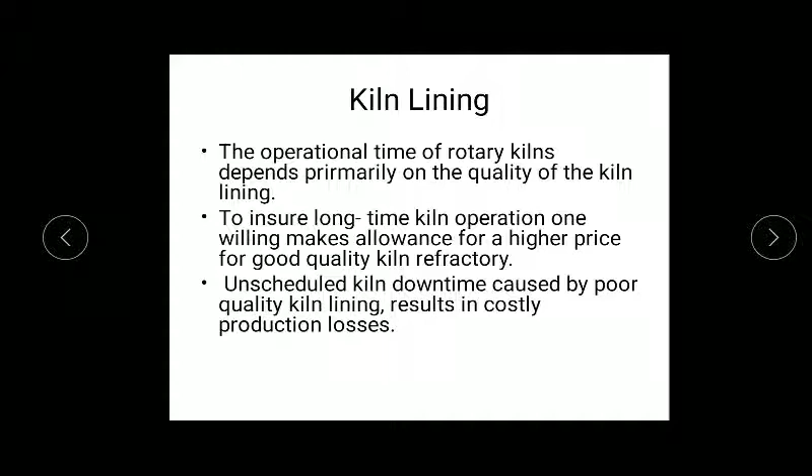And one more aspect which is related to this lining, an economical aspect, is that when you shut down your plant for relining of the refractory lining or repairing of any refractory lining that has been damaged, you are actually causing loss. So it is not very economical to shut down frequently and redo the lining. Hence it is better to spend more on refractory quality and have a long running refractory to have good economy.

So the function of refractory lining is to protect the kiln shell from the influence of flame and of the hot kiln feed, and reduction of heat losses caused by radiation and convection of rotary kiln shell. The main purpose is to protect the shell from the hot flame and the hot kiln feed. There is a burner inside the rotary kiln, and the raw material coming inside the rotary kiln is also at a very high temperature when we are using a preheater and pre-calciner.

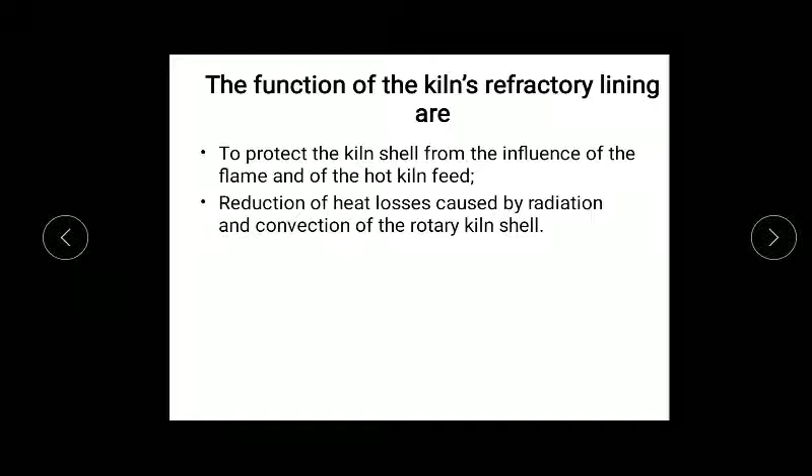And another function of refractory lining is to prevent heat loss. Means the heat which is generated inside rotary kiln should stay inside rotary kiln. There should not be any leakage of the heat, to have heat economy. So the demand made on kiln refractories depends on following properties. These are the properties by which you decide which refractory to use in the rotary kiln.

As you know, there are various temperature zones in rotary kiln, like drying zone, preheating zone, calcining zone, burning zone. The shell material is same in all the zones, but there are different temperature zones, hence different refractory will be used in different zones. So it is not only one kind of refractory; you will need a variety of refractories in different zones.

So to decide which refractory to use, you need to see these properties. You have to see mechanical strength, as the material is being fed into the rotary kiln from some height, and the refractories need to withstand that.

Then refractoriness. Since the rotary kiln is operating at very high temperature and there is certain amount of material lying on the refractories, the refractories need to withstand this high temperature plus high load, hence this is also important. Next one is resistance to thermal change. As you know, there are different zones in the rotary kiln, so there will be a variation in temperature.

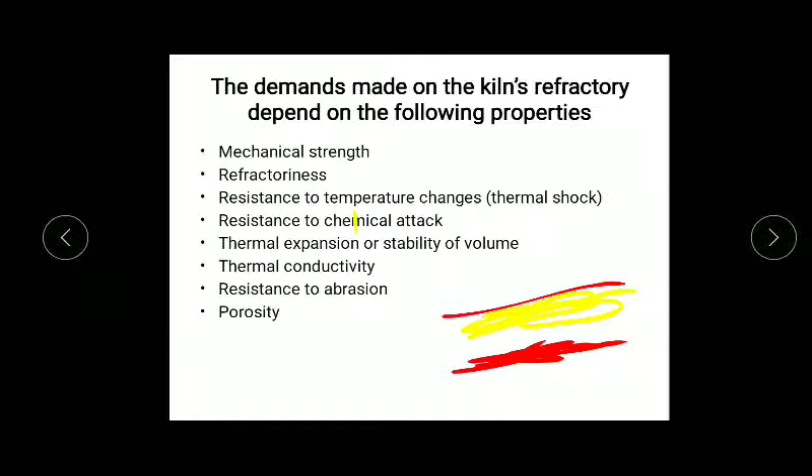Then the last thing is porosity, which is very much interrelated to many of the properties like mechanical strength, thermal conductivity and all, which needs to be taken care of. Then, for installing a refractory lining in a rotary kiln, you actually have 3 ways: one is brick lining with mortar, then you have dry lining, then you have the adhesive method.

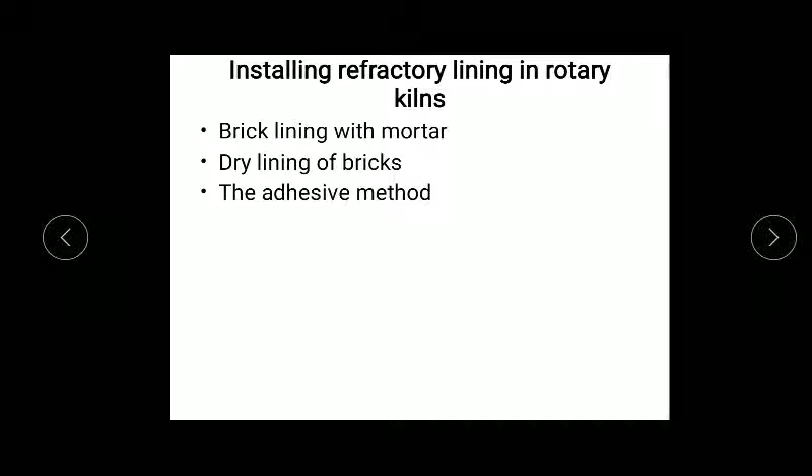So in brick lining with mortar, mortar is nothing but refractory high temperature cement. You take that cement, you take refractory brick, and you line the first half semicircle of the rotary kiln. Then you place a screw jack which will hold the refractory only at the ends, and when the cement sets, they will all stick to the surface.

Then this screw jack is holding the last 2 refractories, and they are all in compaction. They are all in stress, all compacted, meaning there is pressure from here and here, hence they are held tight together, and only these 2 refractories at the end are fixed with screw jacks.

Then when this semicircle is completed, the rotary kiln is tilted 90 degrees and again it is lined here. Then the screw jack is placed here, you can see in this figure. Then after this the rotary kiln is tilted another 90 degrees, and the rest of the refractories are lined here.

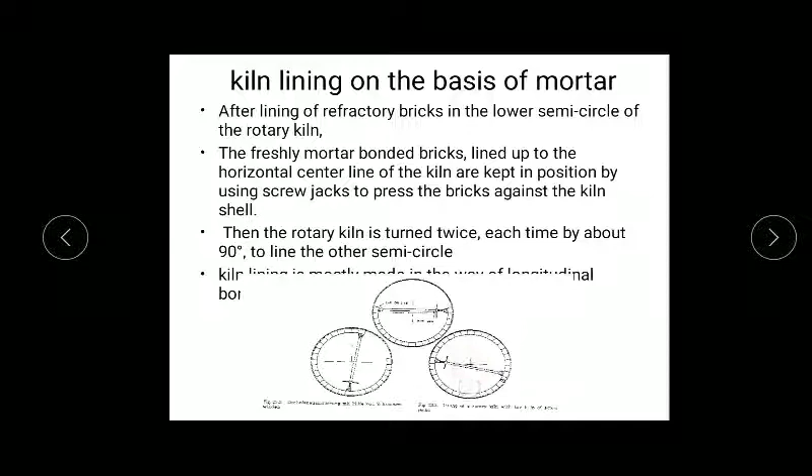So there are 2 ways in which this refractory can be lined. One is the longitudinal way and another is ring formation. You can see here in this diagram, the refractories are lined in the longitudinal direction. First the semicircle is done, then it is rotated and another semicircle is completed.

But in ring formation, you form the first ring completely, then the second ring completely, then the third ring completely. In this way you move forward. In ring formation, there is an important thing called the key brick, which is the last brick you place when you complete the ring. That is a very important thing. When you place that key brick, you will remove all the screw jacks, which you will see in the next slide.

In dry installation, you are not using any adhesive or cementing material to paste the refractory to the surface of the shell. You are directly screwing all the refractory to the shell at first, using screw jacks. Then once they are all lined, only one gap is remaining. You fix that gap with a key brick.

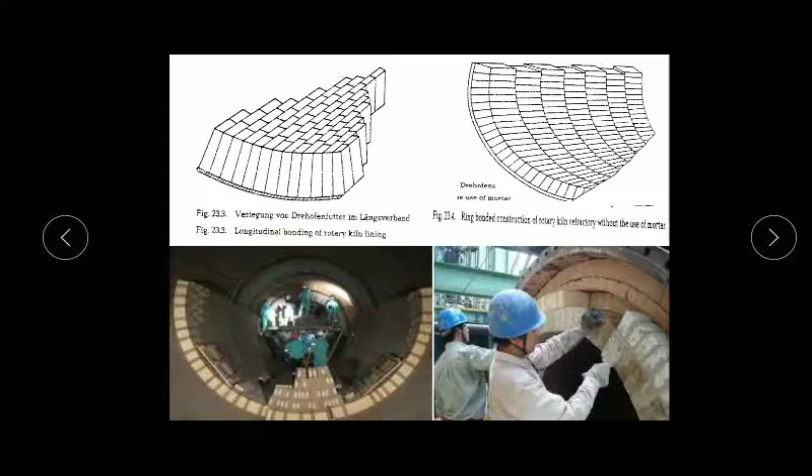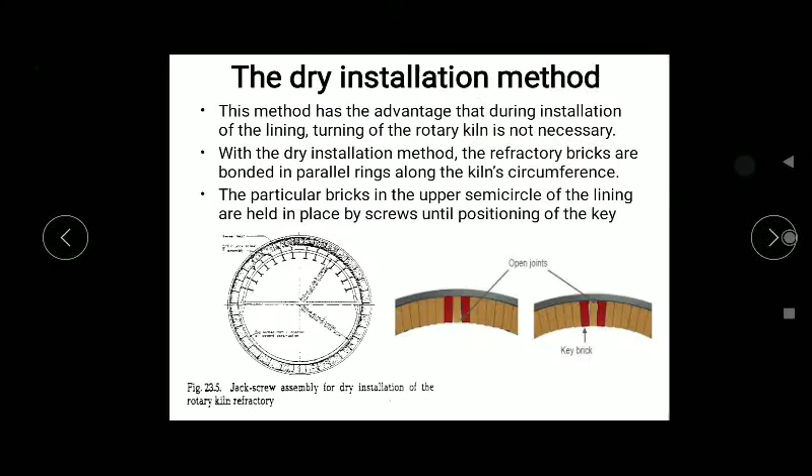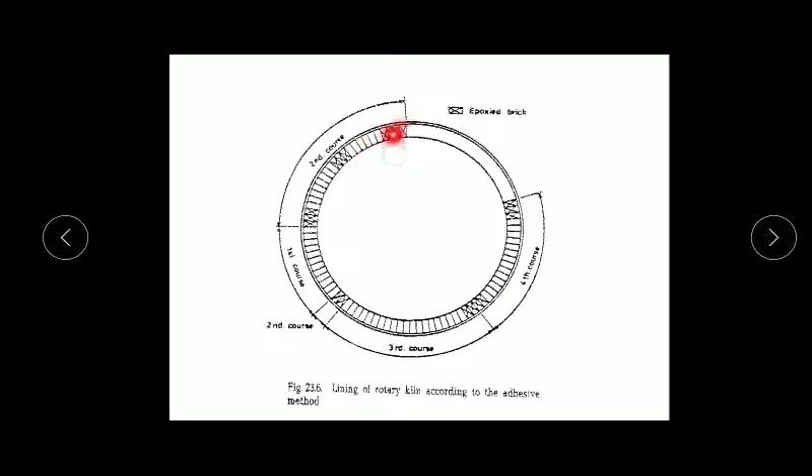Now this part is fixed, means it is pasted, it is glued to the surface using some additives. These are the refractories which are not glued, they are in compression. First this is done, then these refractories are also laid. Because these are fixed, when you place the refractories here, they will be in compression and they will be tight without any glue. They are placed between these two layers of refractory. I hope you understand what I am trying to say.

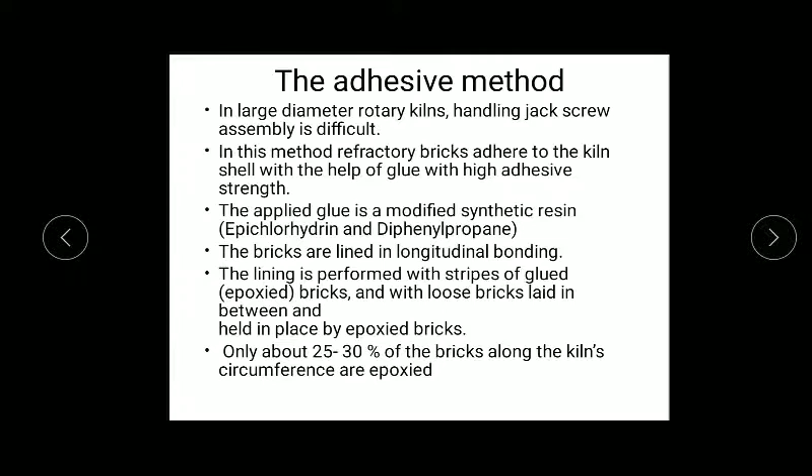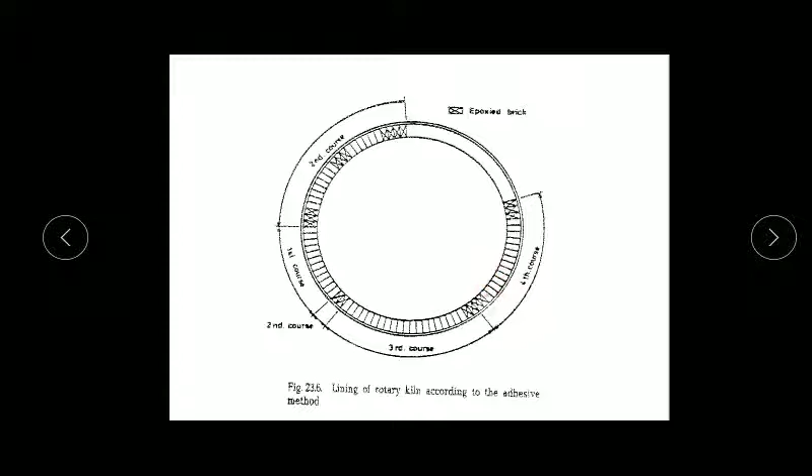So in this method, the glue used can be epichlorohydrin or diphenyl propane. These are some resins which are used for gluing the refractories, and only 25 to 30% of the brick along the kiln circumference are epoxied, means only 25 to 30% are glued; the rest are tightly fixed under compression and are not glued. So these were the three methods in which the refractory lining can be done in rotary kiln.

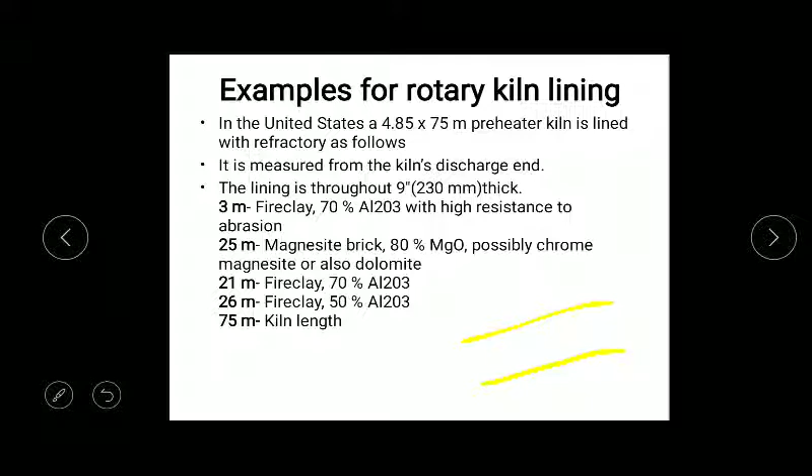Some of the kinds of refractories used in lining the rotary kiln: for example, in the United States, a 4.85 by 75 m preheater kiln, where 4.85 m is the diameter and 75 m is the length, is lined throughout with 230 mm thickness, that is 23 centimeters. The first 3 meters from the discharge, at the burning zone. So this is your rotary kiln, this is your burner here.

Wait, so this is your burner here. This part near the burner, 3 meters, is fire clay with 70% alumina with high resistance to abrasion. Then the next 25 meters is magnesite brick with 80% MgO, possibly chrome magnesite or also dolomite. The next 21 meters is fire clay, that is 70% alumina.

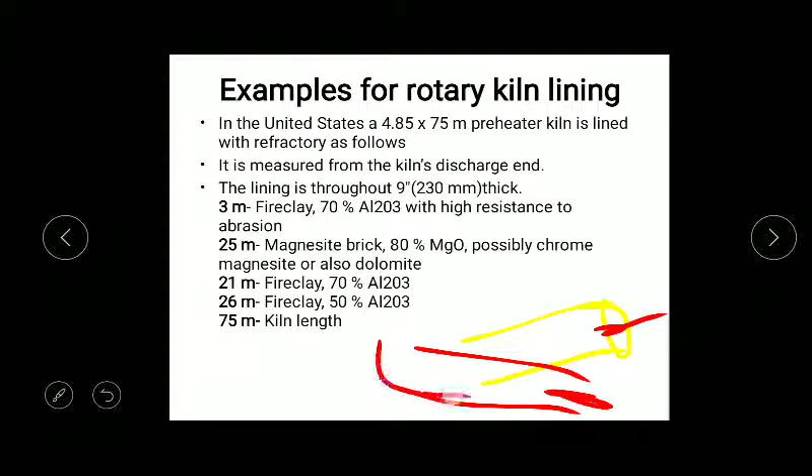Then the next 26 meters is 50% alumina, where the raw material enters. Actually the rotary kiln should be tilted in this direction. Here should be the burner and the raw material comes from here. Another set of refractory bricks which can be used in rotary kiln are shown.